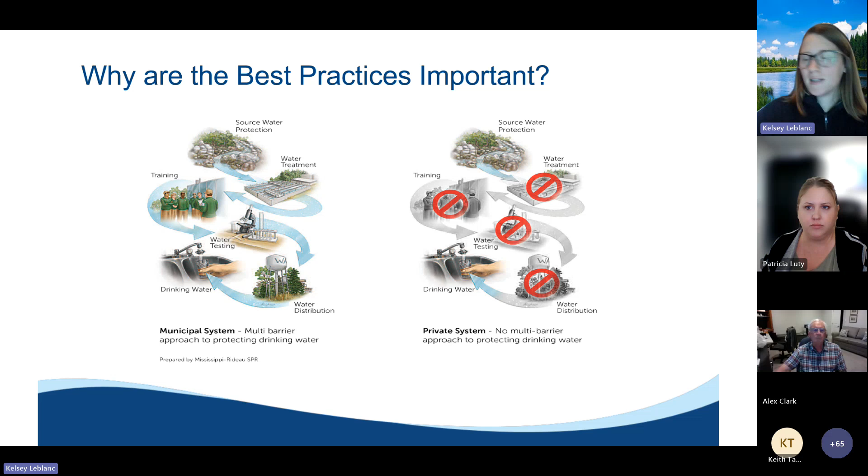So in addition to that gap, I've listed on the slide here a couple of other reasons that the best practices are important. The first being, it can aid in protecting human health and the environment. It can extend drinking water system life by using some of those tips and tricks within the guidance document to maintain your system and ensure that it's operating properly.

It can also help by avoiding high cost of cleanup of contaminated sources, the requirement to seek a new source if your original source becomes contaminated, as well as reducing the high cost of potential required increased treatment needs. The best practices are also great to increase public awareness and accountability for drinking water stewardship. And lastly, they can aid in land use planning decisions.

I'll see what I can find there. Yeah.

So over the next 2 slides, we've highlighted a few measures that private system owners can undertake to better protect their drinking water system and supply. So the first here you've probably heard many times before, but testing your drinking water regularly is a great step to ensuring the quality of your drinking water. As many of you may know, the health unit has free sampling bottles that you can collect, test your water, and send back to test for microbiological parameters. If you are interested in testing other parameters, you can seek out an accredited lab to undertake that sampling.

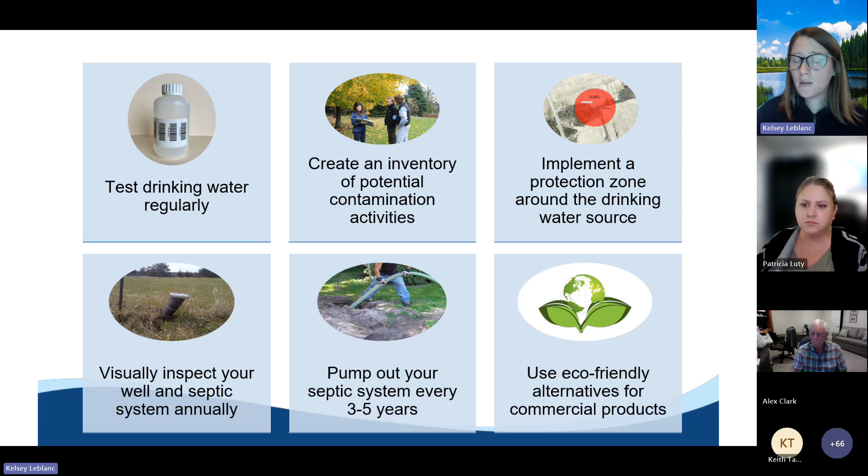So the last 4 recommendations here, the first being conserve water when possible. So when we talk about the best practices, we're not only talking about the quality of our water, but also the quantity. So water conservation can help make sure that your drinking water source is plentiful and is not drying up due to excessive use.

The next is disposing of hazardous waste at the appropriate locations. So it's important to go check your municipal website and identify whether they have any municipal hazardous waste drop-off days or any depots. Some of these examples of hazardous waste or household hazardous waste could include light bulbs, household pesticides, paints, cleaning products, things of that nature. It's important that these are disposed of properly and not through the mainstream garbage and recycling.

The next here is to inspect and install double-walled tanks for fuel storage. Fuel can be a potential threat to drinking water, so ensuring it's properly contained and the tanks that it's stored in are not damaged or rusting is a great way to protect your drinking water. And lastly, if you're on a waterfront property, it's important to keep a shoreline buffer to reduce surface water runoff. This can aid in protecting the surface water of your nearby drinking water source. So with that, this concludes our short discussion about the best practices.

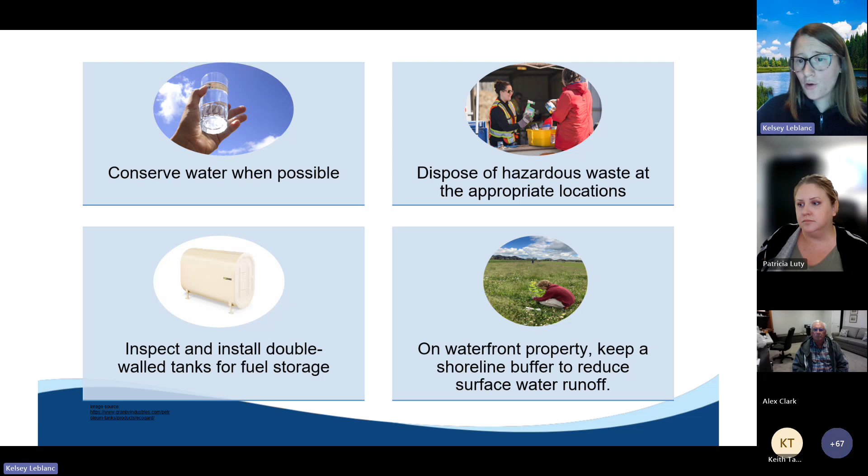And I'm actually going to turn it over to our guest speakers. So as you can see on the slide here, we have Trish and Kyle here today from the Ontario Groundwater Association to speak to us today about groundwater. So thank you both so much for coming. Trish is the office manager with the Ontario Groundwater Association. She's passionate about education and advocacy, focusing on raising awareness about groundwater conservation and sustainable practices. Trish is dedicated to driving the Ontario Groundwater Association's strategic initiatives, enhancing member services, and expanding educational programs. Her vision is to position the OGWA as a leading authority in groundwater management and support the industry's growth and sustainability.

And Kyle is the Vice President of the Education Committee at OGWA and has volunteered with the association since 2016. He's a graduate of Fleming College's Natural Resources, Drilling and Blasting program and has been a licensed well technician in Ontario since 2009. He's contributed to groundwater investigations in Canada, the US, South America, and all the way down to Bermuda. So Kyle's also a project manager at Aardvark Drilling Inc., where he has managed a multitude of well construction, rehabilitation, and abandonment projects for over 15 years.

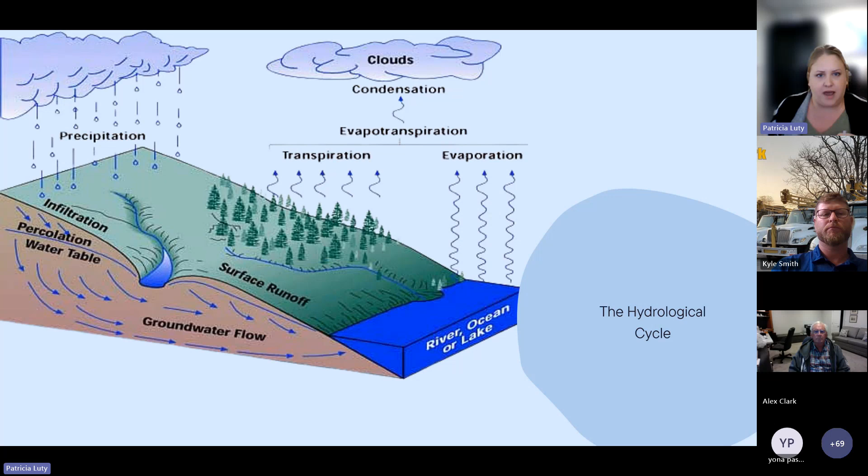In this slide, you'll see a diagram of how precipitation infiltrates and percolates into our water table, then flowing as groundwater through our surface, and then recharging back through rivers, oceans, and lakes into evaporation. So precipitation infiltrates the ground and is stored as groundwater. This study of how it moves through the earth is called hydrogeology.

And geology determines the location, pathways, and the speed at which the groundwater flows. An aquifer is a geological formation that stores and transmits the groundwater. Confined ones are trapped beneath layers of rock or clay that are usually very dense, and unconfined aquifers are covered by more permeable soil or sediment and sometimes exposed to open air.

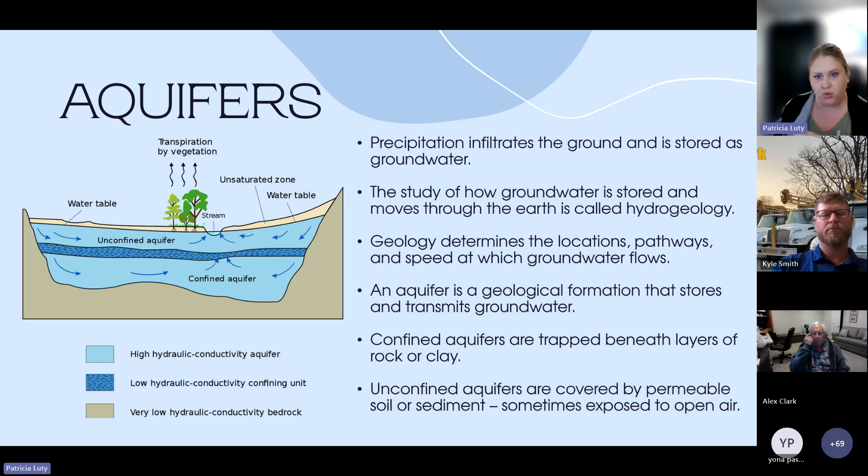Due to their direct connection with surface environments, open aquifers can be more susceptible to contamination from agricultural runoff, industrial activities, and other surface pollutants, including swimming. In Ontario, open aquifers are often found in regions with significant glacial deposits or sedimentary rock formations, and I'm going to go through a few of those locations and aquifers in Ontario.

So in Southern Ontario, particularly around the GTA, Hamilton, and Niagara, these aquifers are composed of sand and gravel deposits left by glacial activity. They're highly productive and often tapped for municipal and agricultural water supplies. The Great Lakes and southwestern Ontario, these are often very influenced by proximity to the Great Lakes, with groundwater flowing into and out of the lake system. They can become susceptible to contamination from surface activities.

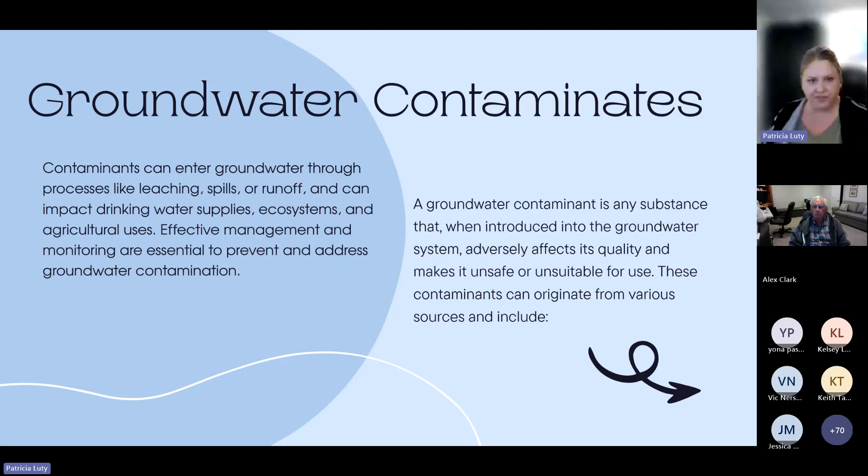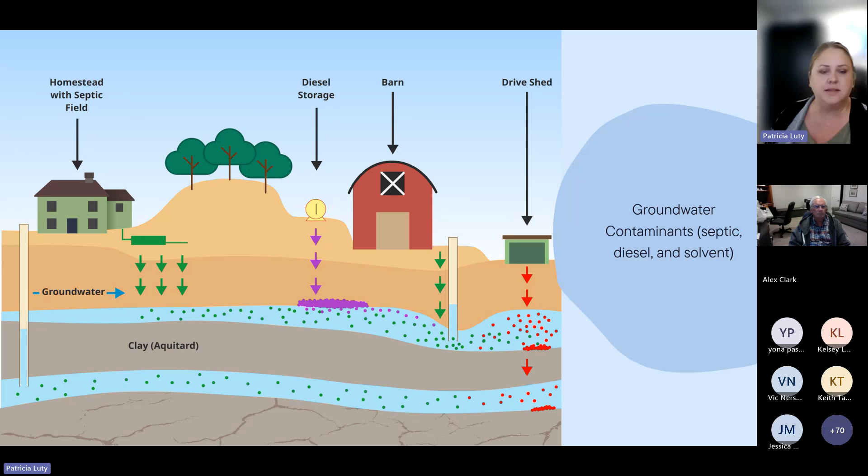In this slide, we have a diagram just showing how the different contaminants can move through the different aquifers. Some of them are more free-flowing, some of them float, and some of them sink. But all three have very big impacts on our aquifers. So I'm going to go through a few very common contaminants.

So nitrates from agricultural runoff and fertilizers and septic systems. The impact of these can have very high levels of health issues, such as blue baby syndrome, and cause effects on aquatic systems. I'm sure we've all talked about pesticides and herbicides a lot, and the improper disposal of those chemicals can lead to health problems, including cancer, endocrine disruption, and affect aquatic life again.

Heavy metals such as lead, arsenic, mercury come from sources such as industrial activities, mining operations, and contaminated landfills. Long-term exposure to these can have serious health impacts, such as neurological damage, cancer, and kidney disease. We have volatile organic compounds such as benzene, found in industrial solvents, fuel spills, and again, improper disposal of chemicals. They can cause a range of health problems, including cancer and liver damage.

Pathogens such as bacteria, very easily flowing, come from sewage spills, agricultural runoff, failing septic systems, and even pet waste. They can cause severe gastrointestinal issues as well as other infections. Salts, sodium chloride, such as our road salts. These can have an effect on the taste of water, harm plant life, and lead to soil degradation. High sodium can also have severe impacts on your health.

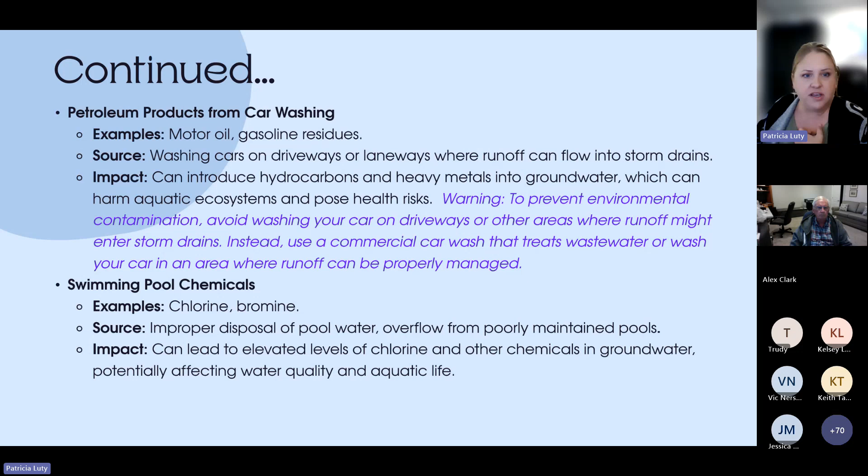Swimming pool chemicals such as chlorine and bromine. The improper disposal of pool water or overflow from poorly maintained pools can lead to elevated levels of chlorine and other chemicals in our groundwater, potentially affecting water quality. A big one in the news these days, you'll probably have heard of a lot, is PFAS. PFAS are commonly found in firefighting foams, stain-resistant coatings for carpets and fabrics, non-stick cookware, and other industrial applications. These substances are used because of their water and grease-resistant properties.

However, they are persistent in the environment and they do not break down easily. They can remain in the soil and water for extended periods of time. As these substances can accumulate in the human body over time, it leads to potential health risks. Exposure to PFAS has been linked to various health issues, including increased risk of cancer, liver damage, thyroid disease, and adverse effects on the immune system. Due to their ability to sink as they are heavy and accumulate in the environment, reservoirs, and biological systems, PFAS can lead to long-term contamination problems, making them very difficult for both the environment and public health.

So what can we do to prevent our groundwater contamination? Dispose of household chemicals, automotive fluids, and pharmaceuticals properly. Wash your cars at commercial car washes that treat their wastewater. Regularly check and maintain swimming pools to avoid chemical overflow and properly dispose of pool water. Opt for biodegradable and less harmful cleaning products to reduce the impact on our groundwater. And limit the use of products containing PFAS, following local guidelines for disposal of such substances.

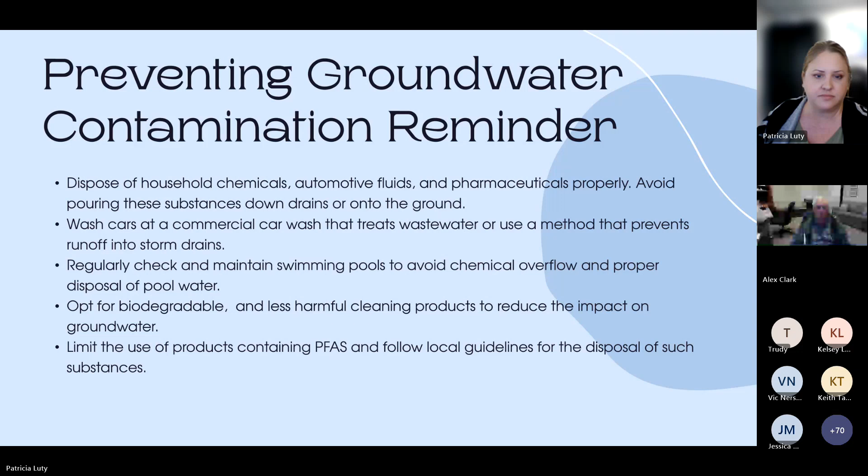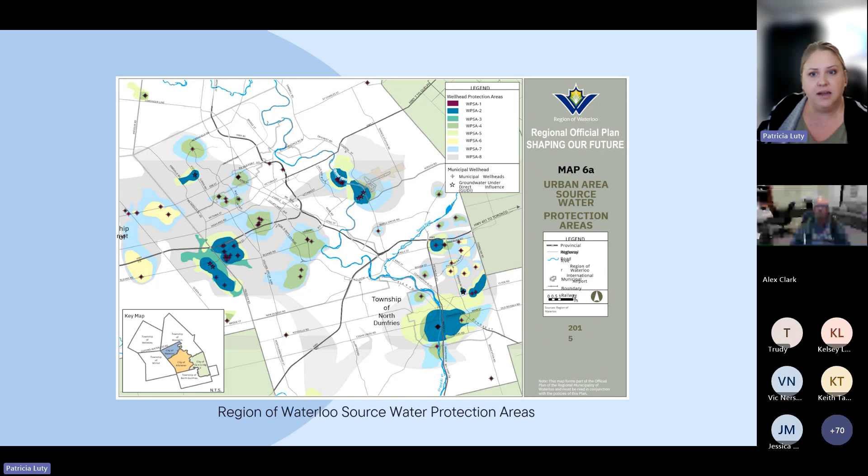So there are quite a few source water maps available through municipalities and conservation authorities that highlight where sources are for groundwater, their vulnerability, and the landscape. This one's just showing the region of Waterloo. And on our next slide, you will see the Quinte area. This map shows almost every well in the Quinte area and its aquifer vulnerability. As you can see, it's very high on the vulnerability map.

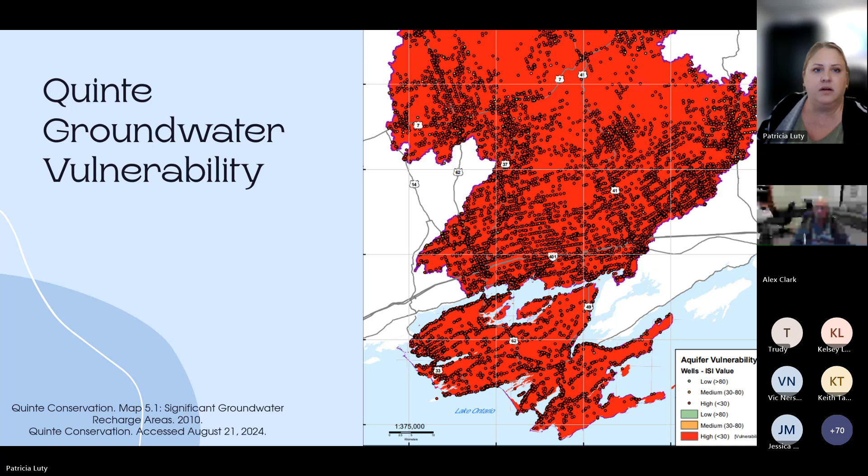So I'll go into a little bit about groundwater filtration and well protection. In Ontario, natural filtration processes play a crucial role in the quality of our groundwater. These processes involve the natural ability of soil and geological formations to filter and purify water as it moves through the environment.

Soil filtration. Surface soil. So this is when rainwater or surface water infiltrates the soil, and the particles in the soil act as a physical filter. Soil can also contain organic matter that helps break down the contaminants and pollutants through the biological process.

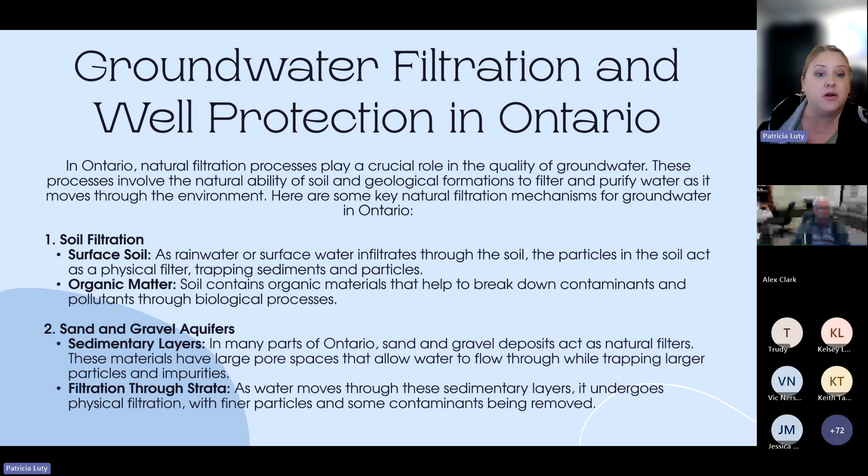In many parts of Ontario, sand and gravel deposits act as natural filters. These materials have large pore spaces and allow water to flow through while trapping larger particles and impurities. As water moves through these sedimentary layers, through the strata, it undergoes physical filtration with finer particles and some contaminants being removed.

Through bedrock formations, such as karst aquifers, these are regions with limestone or other soluble bedrock, the natural filtration can occur as water flows through cracks and fissures. Fractured bedrock. In fractured bedrock or jointed bedrock formations, groundwater flows through the fractures and can naturally filter out the particles and some contaminants.

Wetlands act as natural filters by trapping sediments and pollutants before they reach groundwater. They also facilitate chemical and biological processes that break down the contaminants. Highly vegetated areas along bodies of water help filter runoff. The roots and organic matter in these zones capture and degrade pollutants.

Clay deposits, which can be very thick in some areas, clay acts as a natural barrier to groundwater. It's less permeable, so it can help filter out some contaminants by limiting the movement of pollutants through groundwater.

There are a couple natural chemical processes, such as ion exchange. Certain geological formations can perform ion exchange, where contaminants in groundwater are exchanged with less harmful ions from minerals in the rock. We also have biodegradation. Microbial activities in soil and aquifer materials can break down organic contaminants, reducing their concentrations in the groundwater.

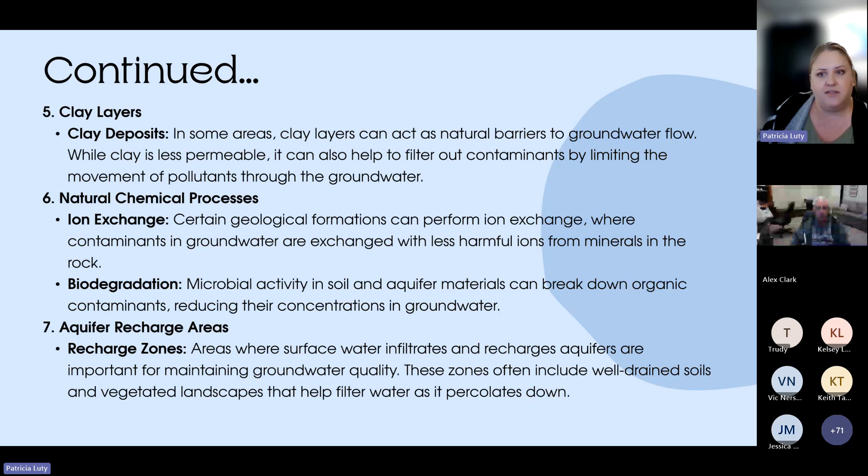And lastly, we have aquifer recharge zones. These are areas where surface water infiltrates and recharges aquifers and are important to maintaining groundwater quality. In the next slide, I'll just have a little image of the Quinte area and the number of recharge zones you have. They're all highlighted in yellow, and the purple line, of course, is the Quinte area.

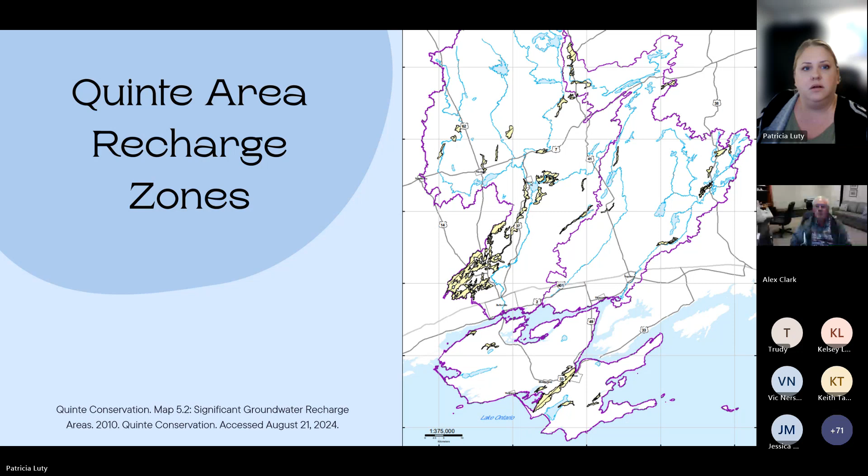So we did talk a little bit about older wells in Ontario, and many shallow or bored wells are quite old. They don't meet the current regulations, are more susceptible to contamination, and can be very expensive to maintain and repair. Accessing and maintaining old wells, especially those in basements of old homes, can be inconvenient and very challenging. Upgrading to more modern well systems offers significant advantages, and we'll go through a few of those advantages in later slides as well.

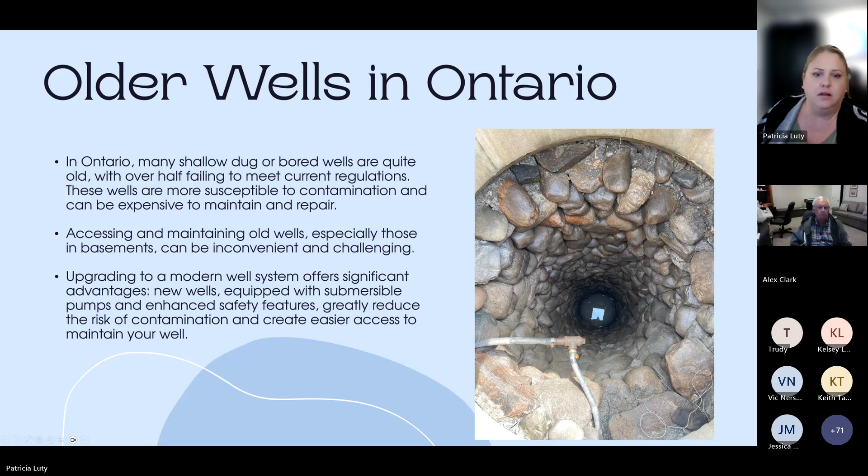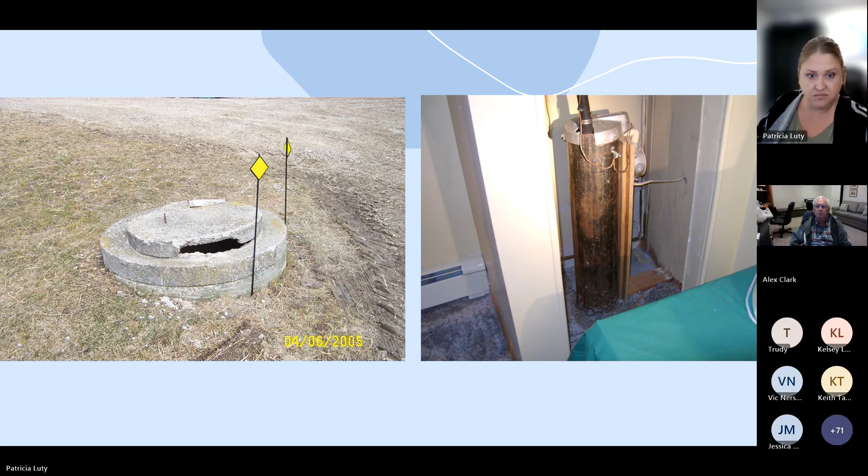So the benefits of upgrading your dug or bored well. Upgrading to a modern well system provides enhanced protection and reliability. These wells are designed to minimize the risk of contamination more effectively than the older wells. They have reduced contamination risks. Dug wells, like I said, are more susceptible to contamination from surface runoff and other environmental factors. Newer well designs feature advanced filtration systems and much better construction standards.

They have long-term safety. So investing in a newer well system ensures compliance with current regulations and standards, providing long-term safety. They have enhanced efficiencies. Newer systems often include improved pumps and filtration technology, resulting in more efficient water extraction.

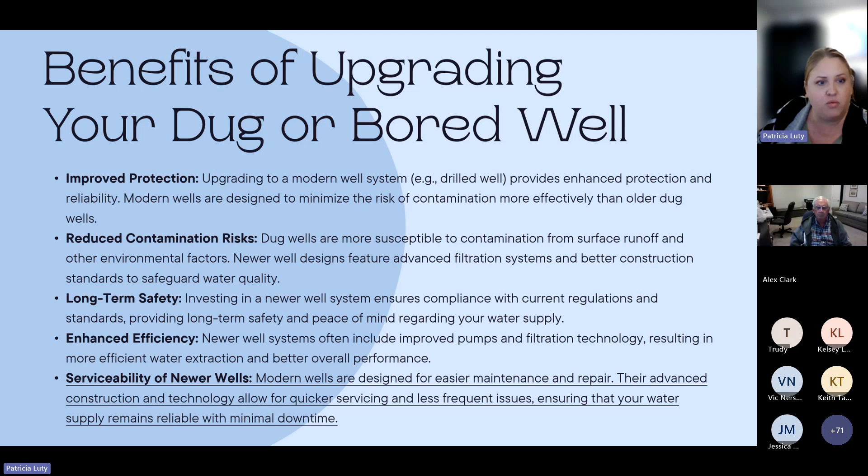And as I said, serviceability of newer wells. Modern wells are designed for easier maintenance and repair. Their advanced construction and technology allow for quicker servicing and less frequent issues, ensuring your water supply remains reliable with minimal downtime. In this slide, you have an image of a dug or bored well. These are, again, the older wells.

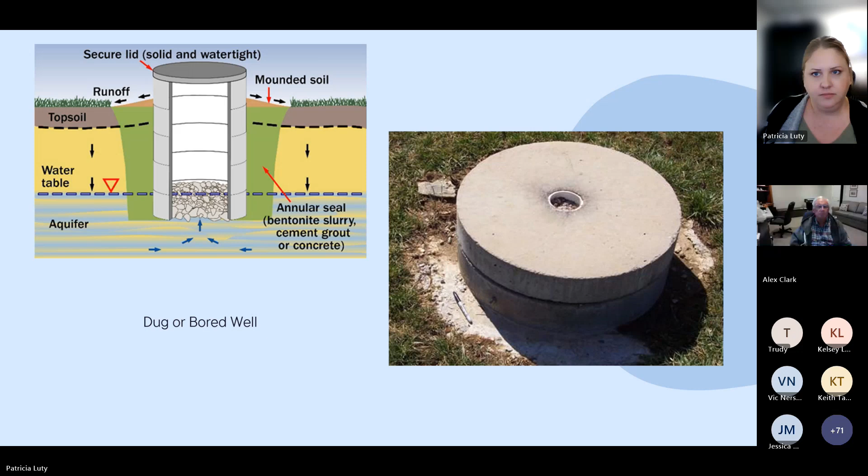So a new drilled well with a pitless adapter. New wells are constructed with up-to-date materials and technology, ensuring longevity and reducing the need for frequent repairs. They are custom designed to suit specific groundwater conditions and your user needs. Modern drilling techniques and materials minimize maintenance requirements and associated costs over time, reducing your maintenance costs. Newly drilled wells are less likely to experience issues like contamination or malfunction.

Professional installation. This is key. It should be conducted by a licensed well technician who adheres to best practices, ensuring the well is properly installed and meets all safety and regulatory standards.

Advanced technology. Using the best technology and equipment, such as high-quality pumps and filtration systems to enhance our well's functionality and reliability. They're also equipped with pitless adapters for more convenient and durable connection between the well and plumbing systems. These adapters eliminate the need for a well pit, reducing the risk of contamination and making maintenance easier. Adaptable maintenance. They're easier to implement routine maintenance and upgrades due to the modern design features.

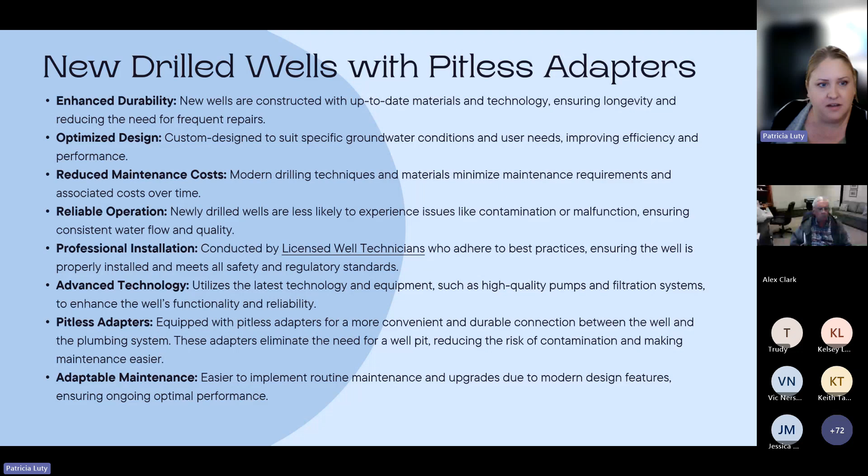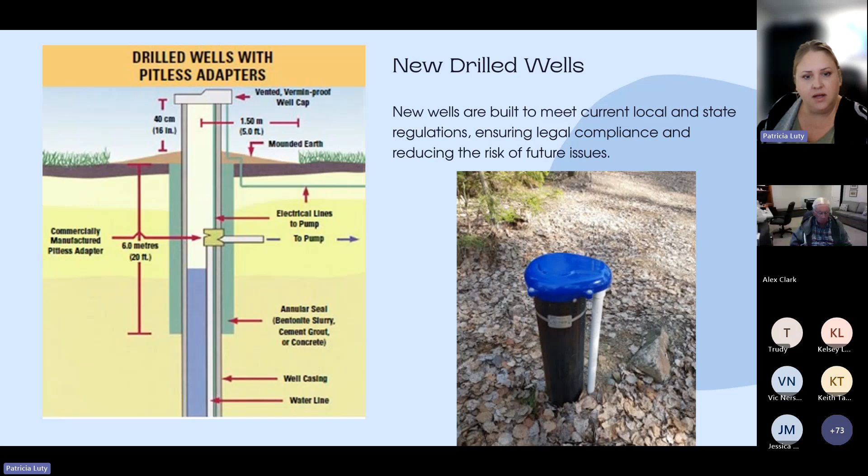In the next slide, you'll see the images of a new drilled well. New wells are built to meet current local regulations, ensuring legal compliance and reducing the risk of future issues. So you'll see on the right, the image showing a proper well with well tag and vermin-proof well cap. In the next, you'll see a couple images of wells that are not properly maintained and are very open to contaminants reaching the groundwater.

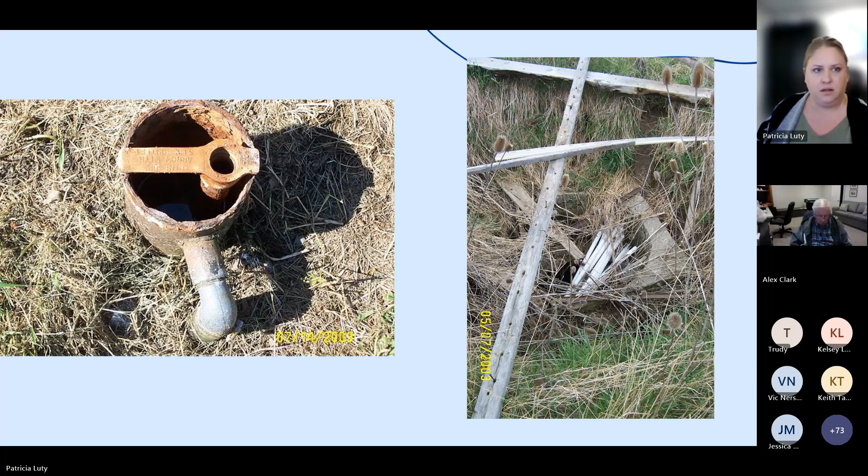So let's talk a little bit about well owner's responsibility. A well owner is the owner of the land on which a well is situated. This also includes a tenant or lessee of the land and the well purchaser. The owner is responsible for regular inspection to be done annually and after any significant events such as heavy rain or flooding. Your key checks: ensure the wellhead is secure, clean, and free of debris. Check for any visible damage or deterioration to the casing and seals. Ensure your well lid is vermin-proof and undamaged.

You need to test your water at least 3 times a year for common contaminants, such as bacteria, nitrates, and pH. You're responsible for your well maintenance and repairs. Hire a licensed well professional for any necessary repairs or maintenance. Ensure that your pump and other equipment are functioning properly. Always clean and disinfect your well and pump systems when any issues arise. Maintain records of all well maintenance activities, water quality test results that you've had done, and any repairs made to your well. Keep a log of changes or issues so that you can track your well's performance over time.

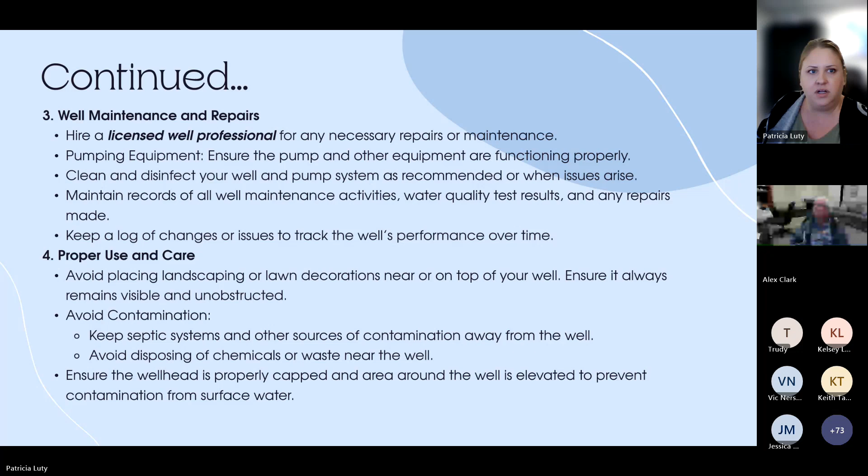Avoid placing landscaping or lawn decorations near or on top of your well. Ensure it always remains visible and unobstructed. Avoid contamination by keeping septic systems and other sources of contamination away from the well. Avoid disposing of chemicals or waste near your well. And ensure the wellhead is properly capped and the area around the well is elevated to prevent contamination from surface water. Be emergency ready. Have a plan in place for potential well contamination or failure, including alternative water sources. Keep contact details for well repair professionals or visit ogwa.ca for your professionals.

Adhere to local regulations. So follow any local guidelines or regulations for well construction, maintenance, and the water quality. Ensure any modifications or upgrades are meeting those standards. Decommissioning of a well, very important. Any unused well or well not being retained for any future use must be properly decommissioned. The well owner is responsible for retaining a qualified person to complete this work.